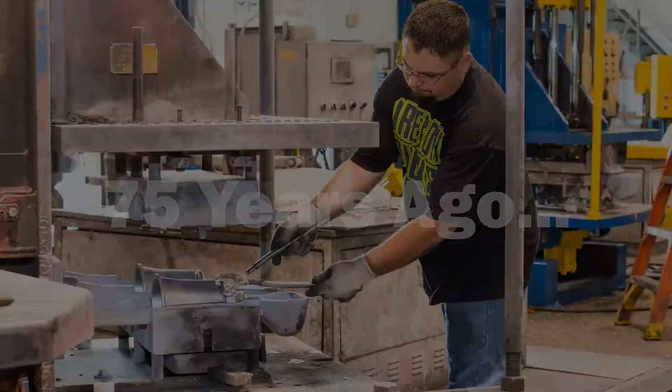Millard Laugle Sr. started Batesville Ornamental Works in his backyard shed in the 1940s. My dad makes sand castings, ram up sand. In the beginning, we used zinc. That's the first metal we poured.

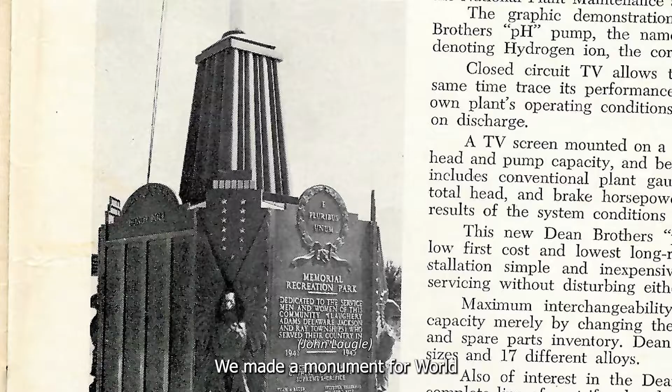The business picked up, and they moved to the second floor above a Kroger building in Batesville, Indiana. Working on the second floor, we carried a ton of zinc up the steps, took about 5 guys. We melted and poured slush metal up there, and we made a monument for World War II veterans that's in Batesville by the swimming pool.

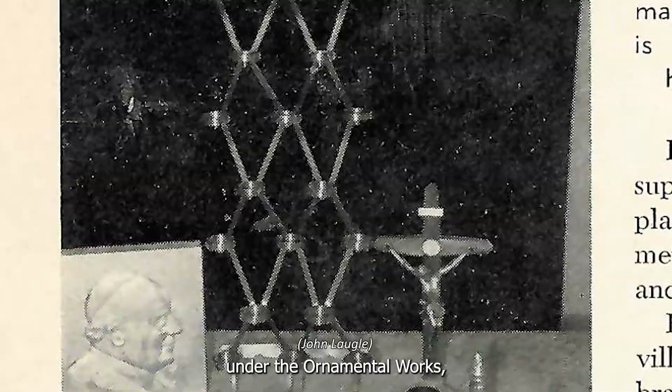When we were still in Batesville, under the Ornamental Works, we did ecclesiastical work. Up in Centerville, Ohio, we made water fonts and stuff like that. From St. Bernard to St. Clements, we made the bronze church doors. My dad made plaques to put on the doors.

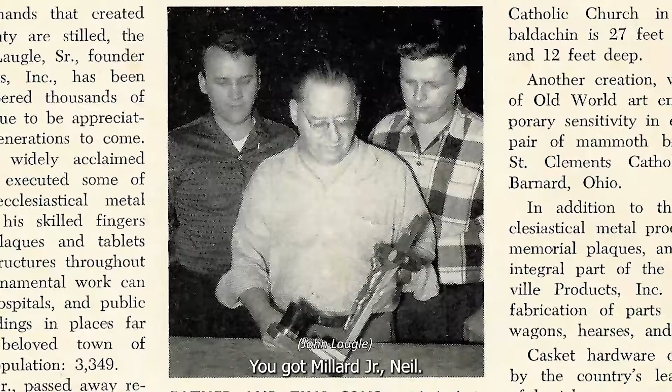Millard Jr., Neil, Gene. Yeah, I'm the one still living. John ended up a great employee and a wonderful asset.

Neil was John's brother. He did kind of the artistic stuff, a lot of pattern work and tooling and stuff like that.

We incorporated, I think it was in '56 or '57, and moved to Lawrenceburg, and it's still there. That's the year my dad passed away.

Yeah, Justin showed up out of the clear blue. When Dad came into the business, Batesville Ornamental Works had fallen on hard times, and Dad looked at this as an opportunity to take on a new venture.

Dad bought Batesville, it would have been '66. Dad restructured the debt with the bank, and he bought, for $5,000, 51% of the business.

Which was a big jump when you've got 10 kids to feed, and on a shaky business. So we always tell the story of that and the courage it took for them, he and my mother both, to take on such a big risk.

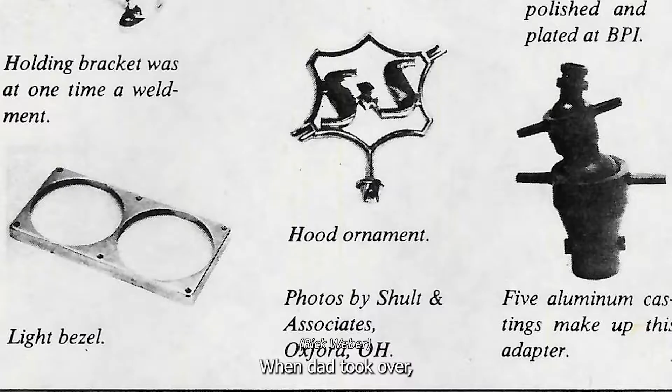When Dad took over, they were doing, I think, about $150,000 to $200,000 a year in sales. They were $300,000 in debt.

When Justin came on board, one of the first things he did was make sure everybody got paid. So Justin, that's where his management came in and so on. He didn't know how to do it, that's all. Yeah, Justin just started slowly building it up.

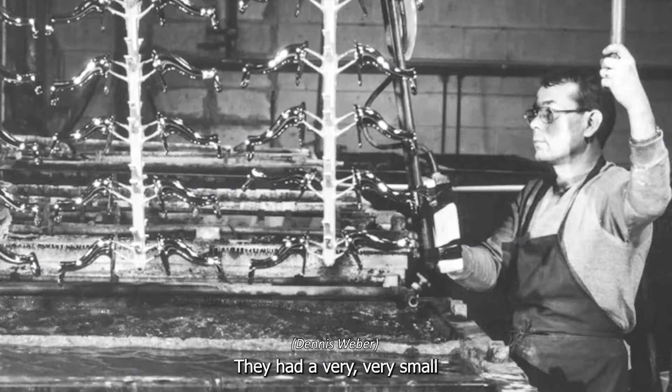At the time Dad bought this, the only building was the cinder block building on Margaret Street, and then a smaller building on the back, kind of almost like a lean-to, where the buffing was done. They had a very small plating department and the foundry, and that was the entire thing. I think there were like 15 employees, 12 employees, something like that.

I always think he thought that if you weren't growing, you were dying. So he always felt like you needed to push the envelope a little bit beyond your comfort zone. And I think the buildings were added on because he saw the restrictions of the current buildings being what they were, that if the company was going to grow into other areas, especially machining or something other than what they were currently doing, they were going to need more space.

The first big expansion was to the back where the buffing room was. That probably would have been in the mid-70s, and then they added on the third building onto the back of that, and then eventually the fourth building.

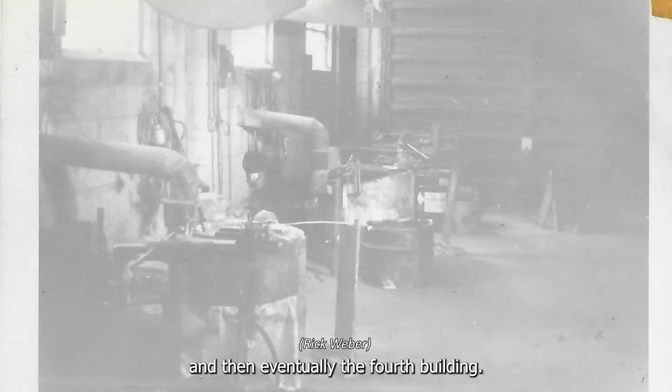So it was kind of a section by section expansion. If you look at the building in Lawrenceburg, it looks like a hodgepodge of different walls put together like Lego blocks. And that's because of the way the growth of the company came. It came in incremental pieces, so it wasn't like they could go out and buy a new facility or invest in a new facility. They had to work with what they had and just expand upon it.

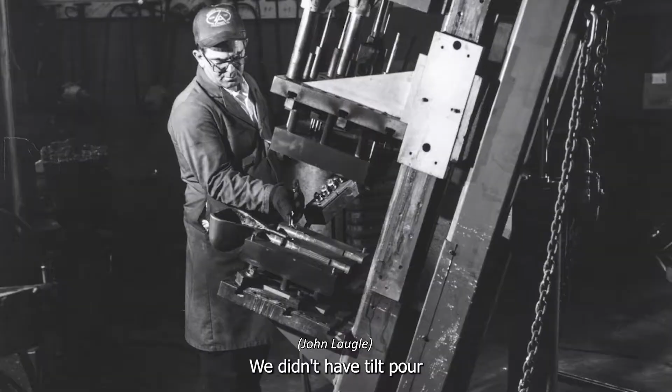We didn't have tilt pour, CNC machining. So Ricky and the guys came on. Well, they did some machining from the very beginning, but mostly just drill press kind of stuff, drill press and tapping.

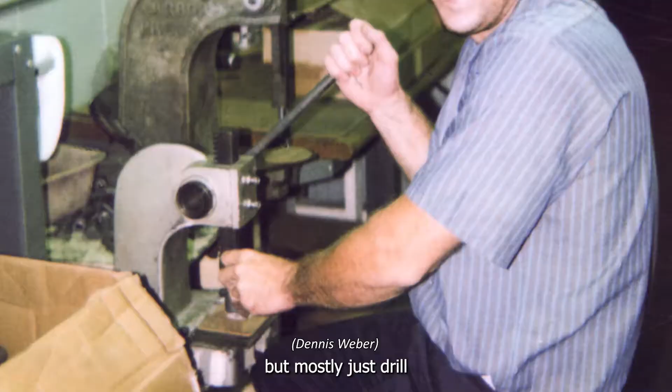They made the early decision to jump into CNC machining. So we bought 3 machines that were all used, but it gave us the opportunity to learn the technology and start to get into that field.

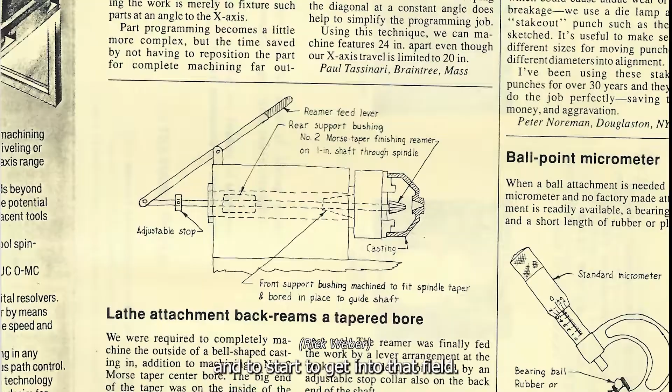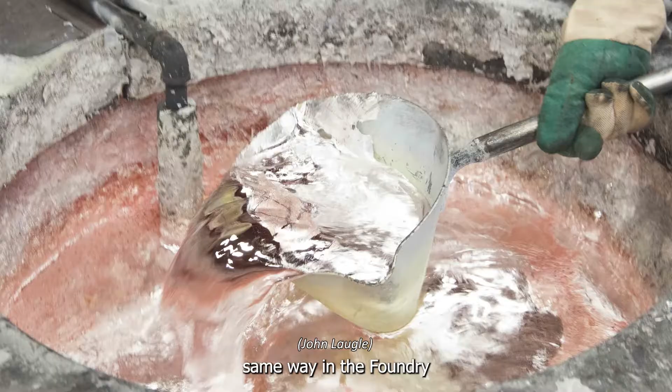And fairly quickly after that, we started to upgrade the equipment and bought some CNC equipment that was brand new. Little by little, you just add another machine here and there. Same way in the foundry, adding the electric melting furnaces, learning to do tilt pour and all that kind of stuff. So Batesville Products has always been involved with technology, whether it's not necessarily just robots and computers, but abrasive technology. Technology has to do with the chemistry, better castings through chemistry.

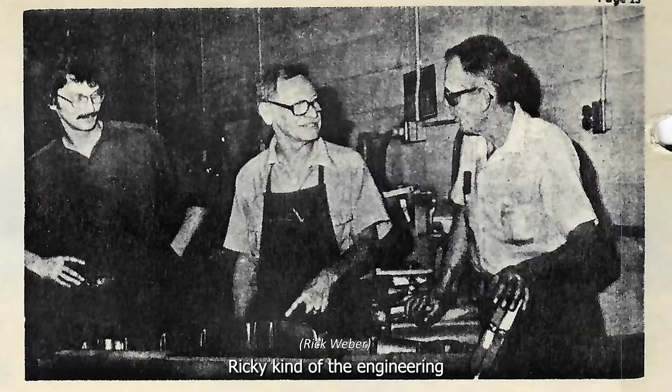Ricky kind of did the engineering when Justin was there. I worked basically on a lot of the shop floor jobs, learned the ropes through there, and then kind of went into engineering and machining, and from there, kind of worked into some mid-level management before I became vice president.

In '74, '75, something like that, I came back as a sales manager. In a matter of about less than a year, I had brought on maybe 8 fire truck companies, and that's when the business really, I think, started to grow.

Once Dad passed the company along beginning in 1989, I think from that point on, it was a team effort. We kind of built a management team that stuck together for close to 25 years. I think from the very beginning, this has been a very family-oriented company. We've built upon that and continued upon that.

Well, it was a family management team for sure. I was president of the company in 1989. My oldest brother Jay was executive vice president. Tom Kirsting, who's my brother-in-law, became vice president and general manager. Terry McCarthy became sales manager and vice president of sales. And Tim Weber became sales and advertising marketing.

So that group of 5 of us all working together was able to continue to do the things that we had done earlier, but even build upon it even more. Yeah, so the future looks very bright.

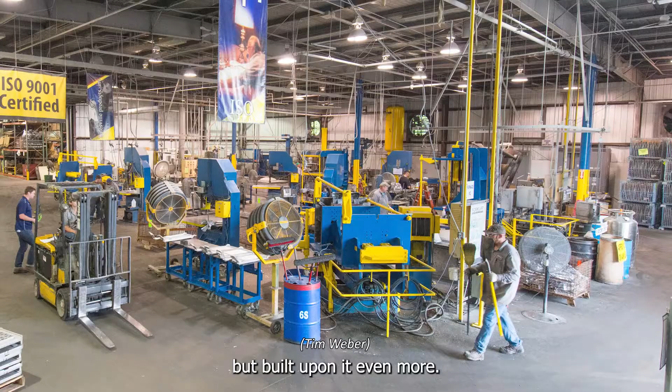We've been very involved with the community in different ways over the years. We've got a lot of good people in the foundry, a lot of good people in the engineering, a lot of good technology, a lot of energy, a lot of history in the machine shop. Same thing in the polishing area.

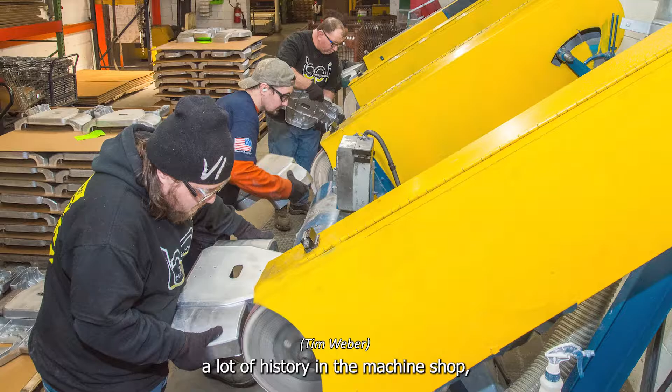After Len came on board as president in 2015, I served a couple years as CEO of the company and then retired in 2017.

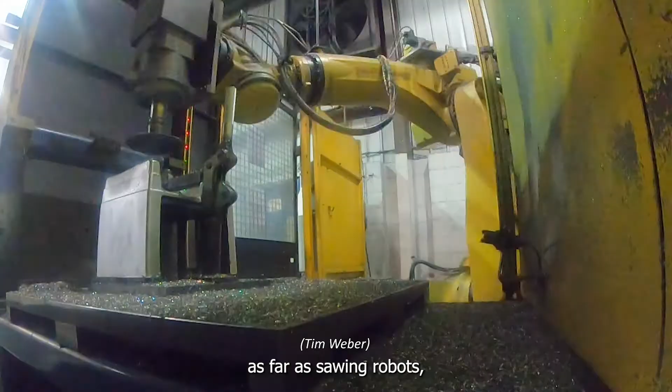Several years ago, we got involved with robots, but then we've really stepped it up the last couple of years as far as sawing robots, working on robots that will assist in the machine shop. We have a robot set up in the polishing department, so those type of things have really stepped up.

It's a very stable company. We're not going anywhere. We've been here for 75 years. Very family-oriented, innovative. Family, loyal, and outstanding.

In 41 years, I've never seen a soul laid off at Batesville Products. We've got lots of employees here that've been here, 20, 30, 40 years. I'm in my 38th, 39th year here at Batesville Products. I have been here over 33 years. 41 years. That's a good underlying story to this general success of the business.

Think about all of the family members that have wandered through there at various times. Batesville Products is a family-owned company. We've got a large family, 10 kids in the family, 5 boys and 5 girls. We've all worked here at different times. I think the family interest is still there.

I always talk about the adage of shirt sleeves to shirt sleeves in 3 generations. It's you get to that 3rd generation, and there's a big question mark on whether you can make that leap from 2nd to 3rd generation. We are currently into the 3rd generation working here at Batesville Products.

Tim Williams is the national sales manager, and Rachel Weber. Rachel is Len's daughter, very much a family environment. You always try to keep attracting the next generation for the future.

I've had such a fantastic career and such a wonderful life that I would not have been able to do any of that but for my early experience with Batesville. Yeah, I wouldn't be here today if it wasn't for the shop. We couldn't have done any of this stuff there if I didn't have my life with the Batesville Products.